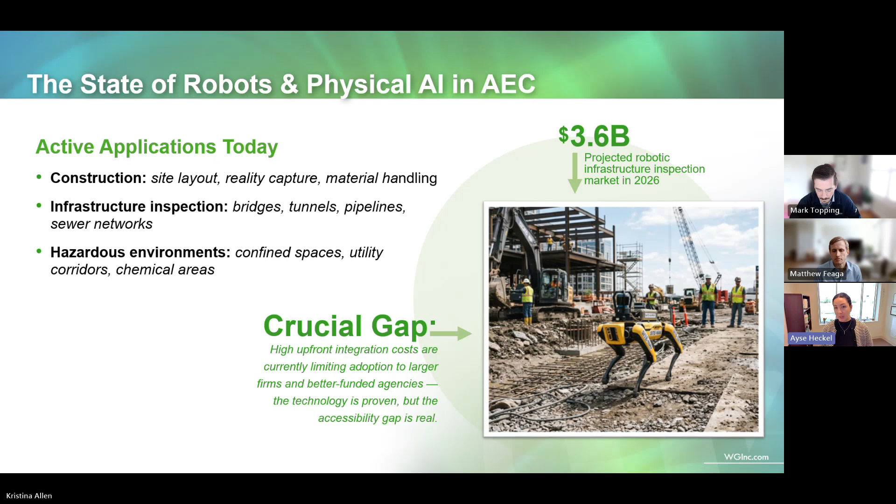That data doesn't disappear when the robot leaves the site. It feeds directly into digital twins, asset management platforms, and that is where the compounding value lives. So every future decision about that asset becomes better informed. The robot is building that evidence base.

The future model here is humans plus machine collaboration. So it's augmentation, not replacement. The people in this field aren't going away—they're being freed up from dangerous, repetitive, or time-intensive work to focus on judgment, interpretation, and action.

One crucial gap to flag is data interoperability between platforms from different vendors. This is a large hurdle—outputs from systems made by different manufacturers often don't integrate cleanly into existing project workflows without significant customization.

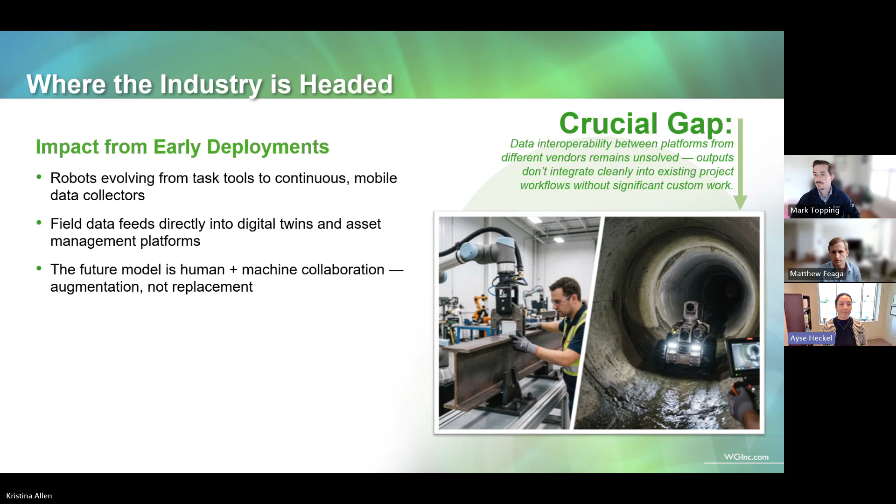Now, the challenges the industry is working through. High upfront integration costs are limiting broader adoption. While we see that decreasing, it's not fully accessible to everyone in the industry.

Plug and play deployment at scale is not here yet—every site still requires meaningful customization work. Data interoperability gaps between vendor platforms slow down workflows, and change management adds real friction to adoption decisions.

Regulatory frameworks for semi-autonomous systems operating in public infrastructure environments are still developing, which creates uncertainty that some clients and agencies are navigating very carefully.

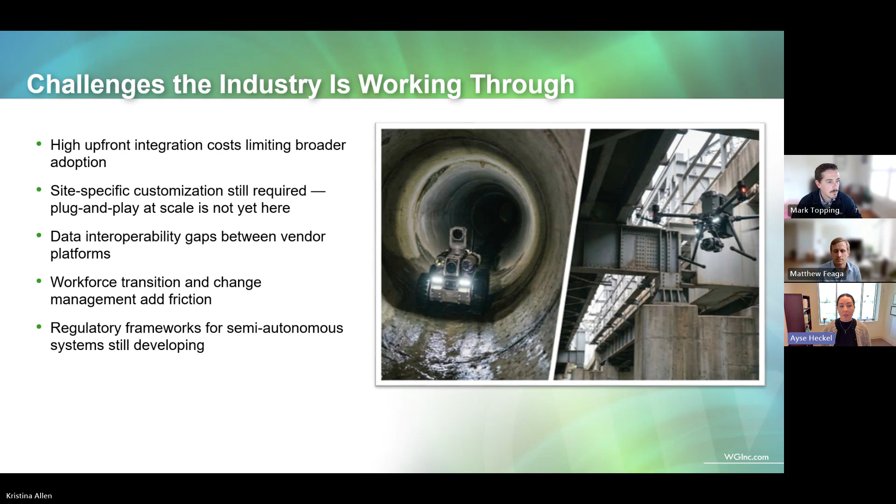So to frame all of these challenges: these are barriers, not deal breakers. They're shaping the pace and pattern of adoption, not stopping it. The question for any agency or firm evaluating this technology today is not whether to engage, but how to engage thoughtfully, with the right strategy and the right partners.

So how is WGI positioned? How does WGI interact with this new technology? Let me be very direct about where we fit and where we don't. As of right now, WGI is not building robots and we're not operating them. Our value is in the intelligence and data layer that makes robotic systems useful over time.

Our digital service and innovation engineering practice tracks where physical AI intersects with infrastructure delivery. Our geospatial data collection capabilities, digital twin development work, and modeling capabilities are directly applicable to the integration challenge that physical AI creates.

So the way I'd frame it is that WGI provides the digital infrastructure layer that turns robotic data collection into long-term asset intelligence. Whether a client is evaluating robotic inspection for their bridge portfolio, thinking through site automation on a project, or working through a data integration strategy, WGI bridges the gap between what the technology can do and what the outcome really needs to be, for any project of any size and scope.

And with that, I'll hand it over to Matt, who's going to walk us through what's happening on the 3D printing side.

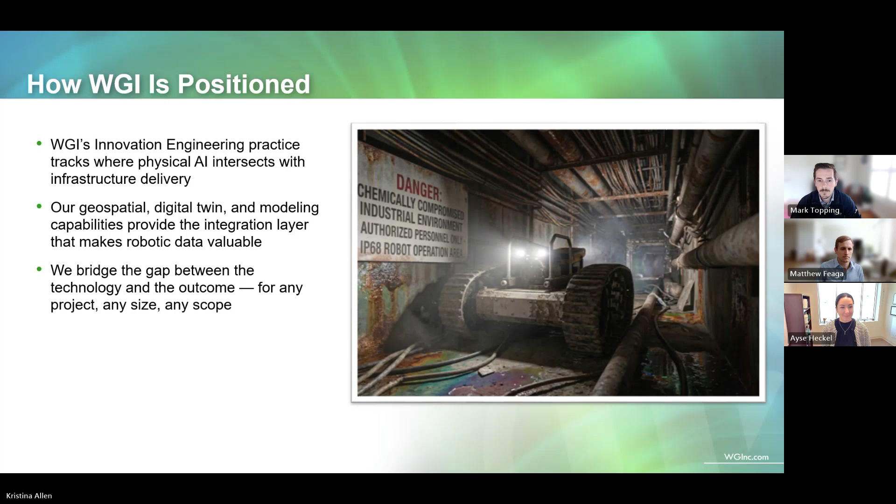Hi everyone, I'm going to talk about some exciting new developments in 3D printed building technology. 3D printed buildings are not really new news anymore—the technology's been around for many years, and many of us here today have probably either seen or been inside an actual 3D printed building at some point.

It's been around long enough that WGI has provided MEP and architectural services to Icon on multiple projects of varying scale over the last several years. If you aren't familiar, Icon is probably the best known 3D printing company out there, and we've worked on projects ranging from prototype to residential development and even larger scale standalone buildings.

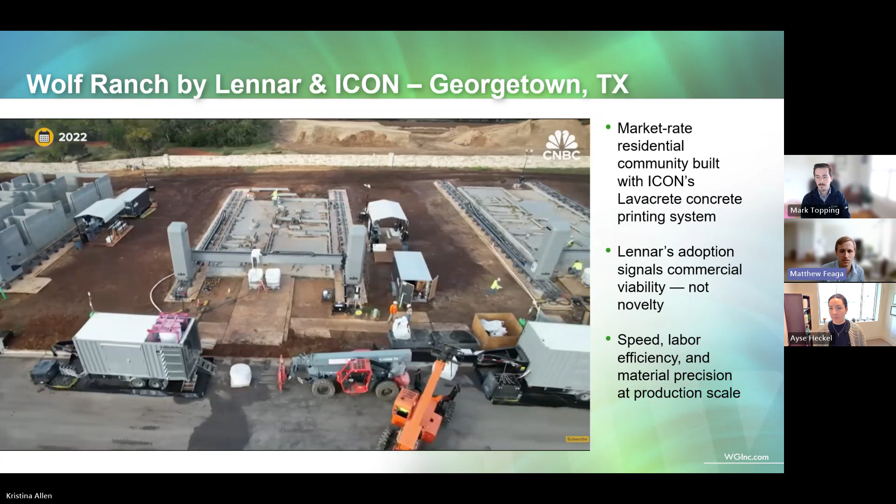To get a feel for what 3D printing has been able to achieve in recent years, we'll start by showing part of a 2022 CNBC segment on Wolf Ranch, a residential development by Lennar and Icon in Georgetown, Texas, north of Austin.

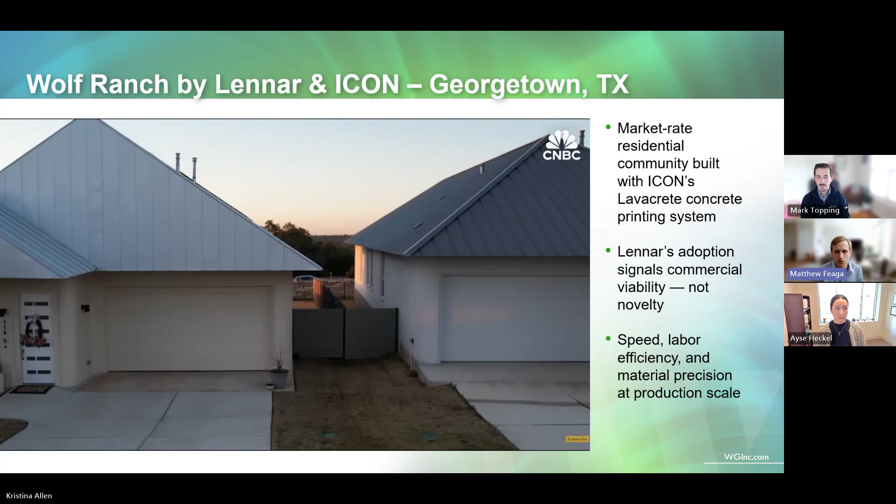You can see that gantry style printers have been the main technology so far. This style of printer is basically a print head on rails that puts down layers of concrete material that build up forms like wall systems and columns. In concept, these printers work the same way as the small 3D printers you can buy online for your home or office.

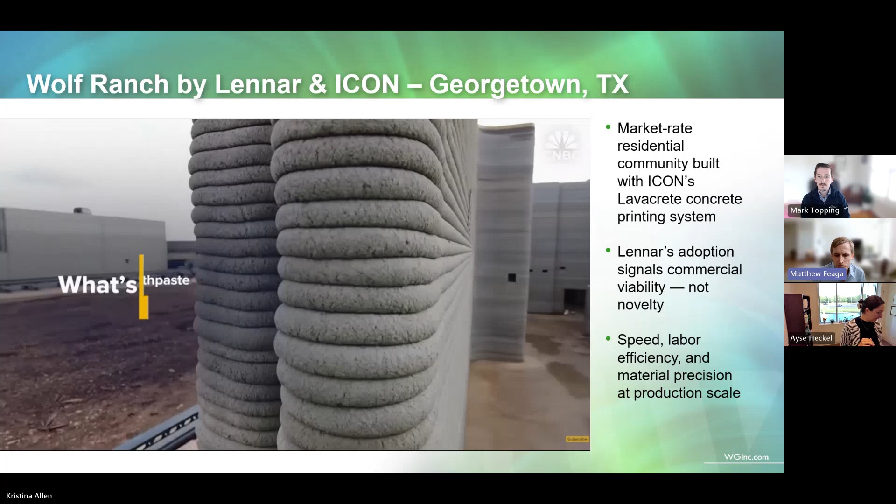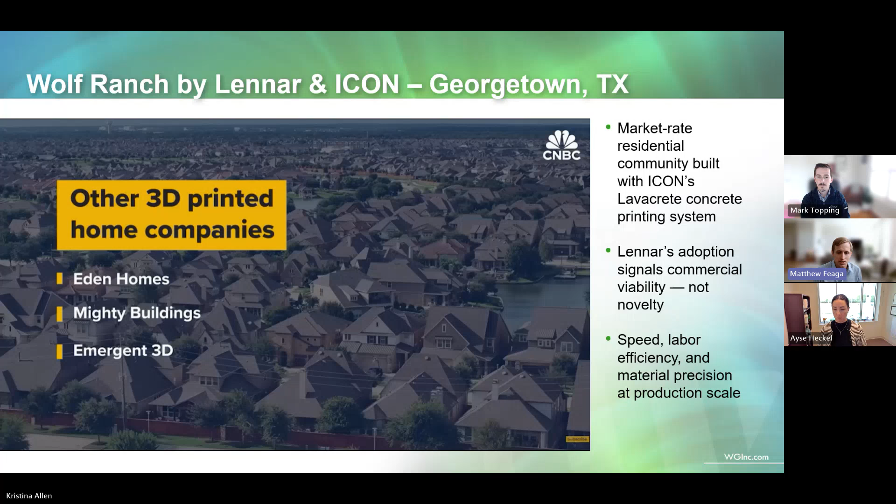The idea behind 3D printed buildings has always been to make construction more efficient, affordable, resilient, and customizable by feeding your design into a machine that does most of the hard work for you. So while the idea has a lot of potential and has had success, as you can see from this development, scaling it to truly world-changing levels has so far been challenging.

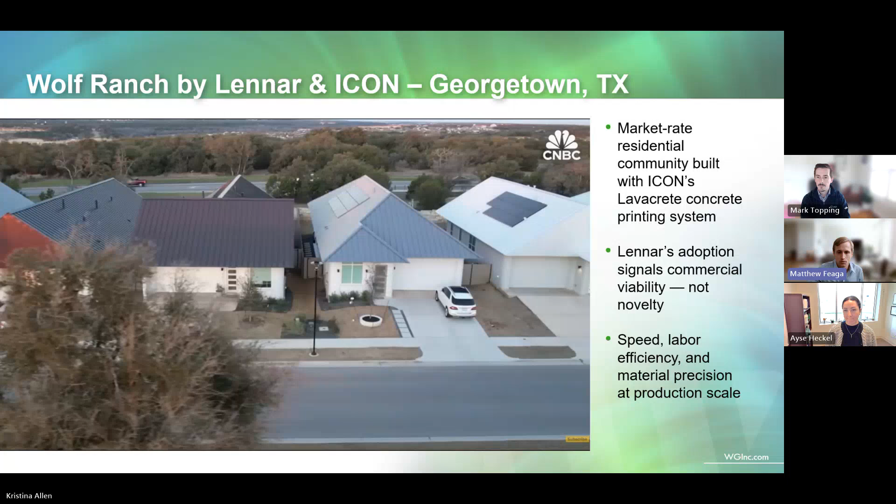Let's talk a little bit about the limitations of these gantry-style printers. Perhaps the biggest issue is that print volume is constrained by the height and horizontal extents of the printer's rails, which typically limits us to printing one story, and only wall systems instead of the entire building, like roofs or second stories.

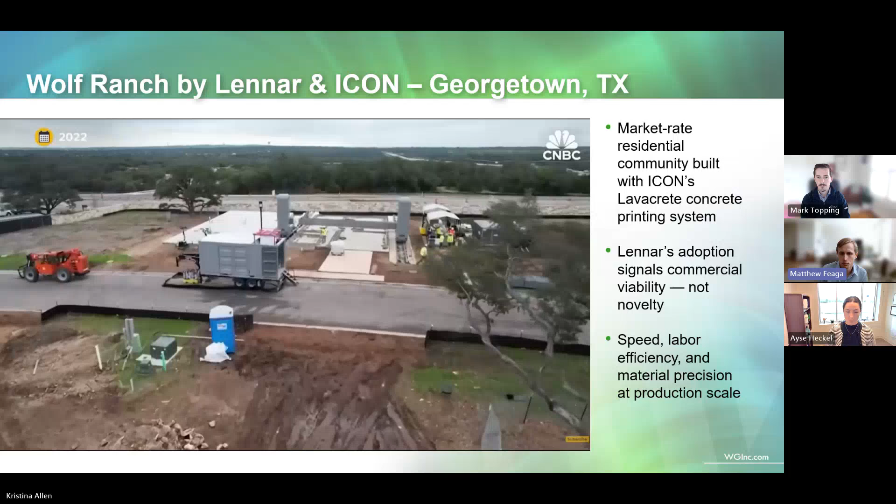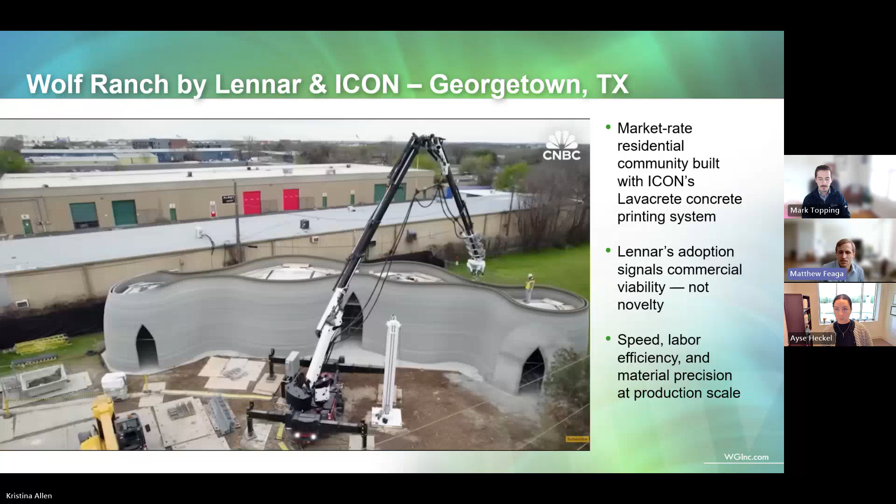Moving and setting up the printers from site to site is time consuming, and print speed is not particularly fast. In addition, a print must be monitored by three operators, meaning skilled labor must be on site at all times while a machine is running. Design and construction coordination to integrate printed versus non-printed systems takes time, though that wasn't necessarily an issue for this Wolf Ranch site.

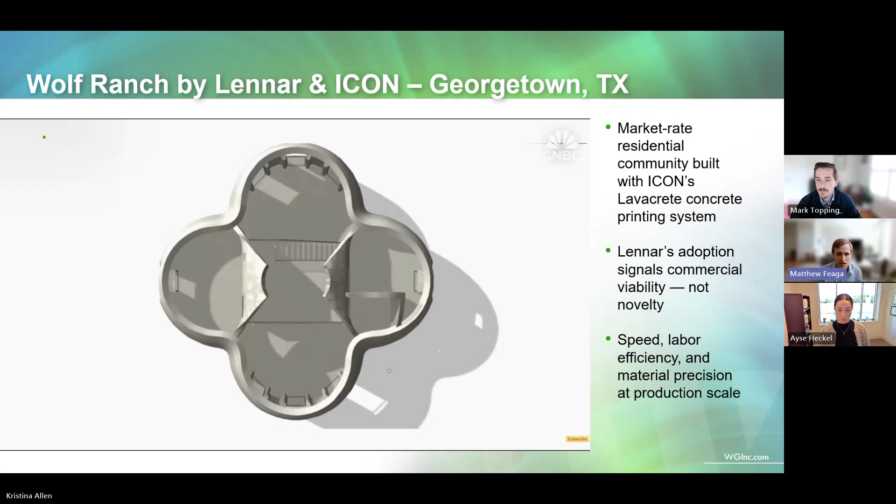It is difficult to maneuver the equipment on tight urban sites, which is why development has so far mostly been done on sites with lots of space, as you can see here. In this video, the leaders of both companies are extremely candid about what they experienced on this project.

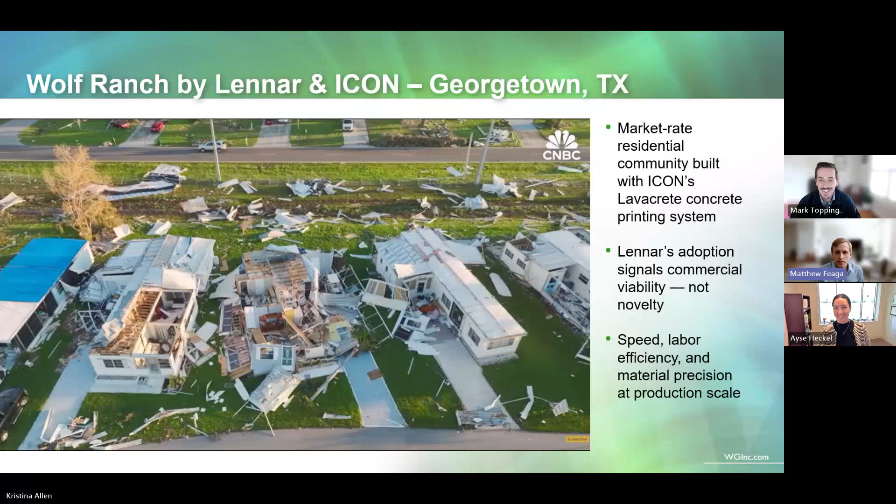This development was a bit of a trial. This lady loves her house, by the way. She's great, you should go watch this video later. They're very open about how this development was a bit of a trial in innovation, and some of the lessons they learned along the way informed how they went about executing the project as it continued on.

This actually led to the houses being marginally less profitable than Lennar typically sees on its standard project. But the fact remains, this is a real market rate residential development. When a home builder at Lennar's scale adopts a technology, it sends a signal to the rest of the industry that this technology and its potential economic benefits should be taken seriously. And in this case, those benefits are not just production automation, but I would argue that the unique building designs add value as well. As you can see, many of these homes have unique features like curves and other interesting elements that drive value.

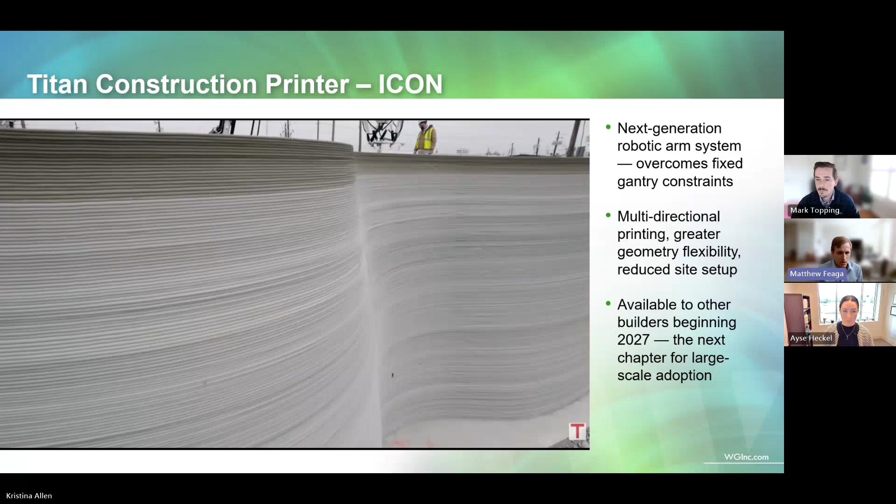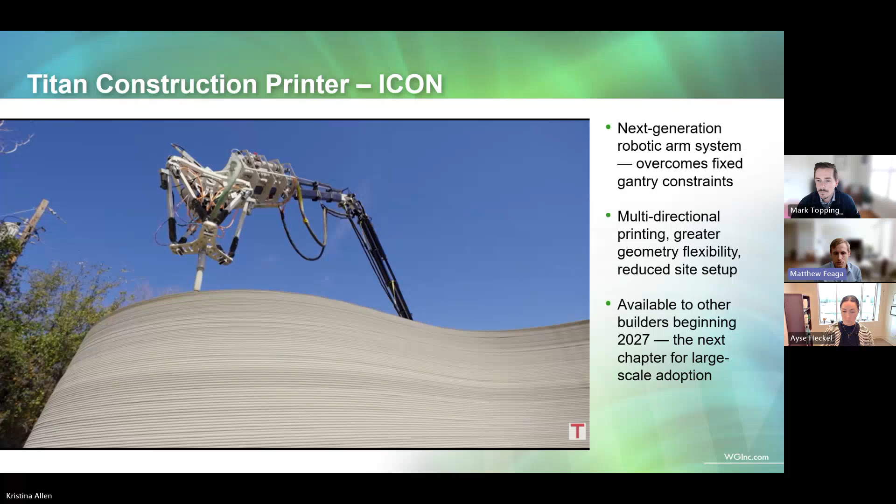So here's another video from Adam Savage's Tested. All the challenges that I've discussed previously have led to the need for a next generation of printer. And this printer needs to be easier to use, print taller, and print a more flexible footprint. And as you saw at the beginning of the video, that is Icon's new Titan printer, which is a huge change to an ARM style design.

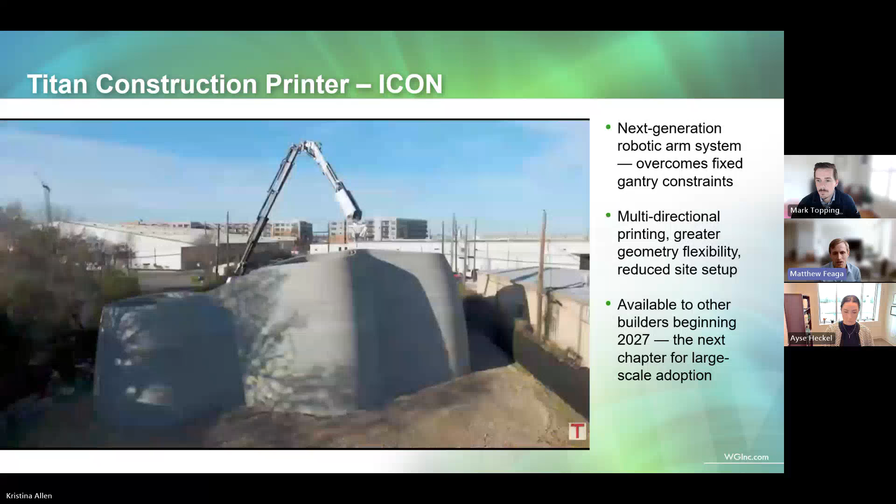Besides printing bigger and taller, this printer also allows for 2 prints for each mobilization, which basically means you set it up between 2 sites and it can spin around to cover more area without having to move it.

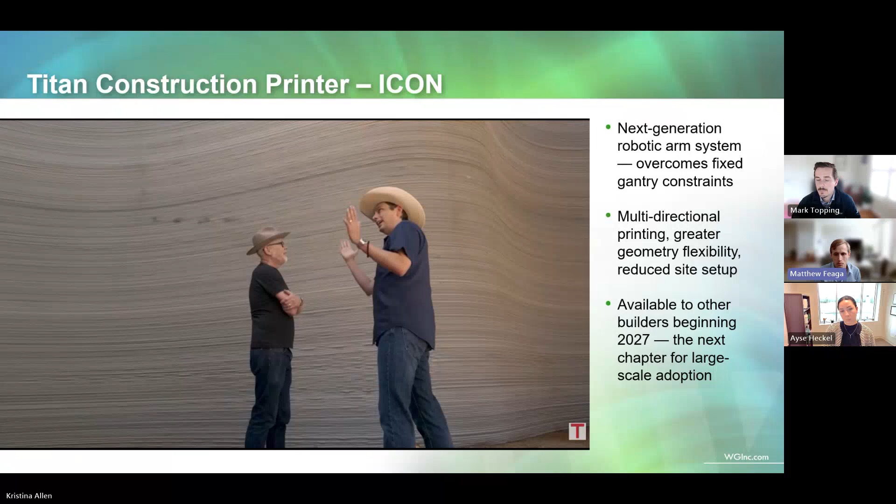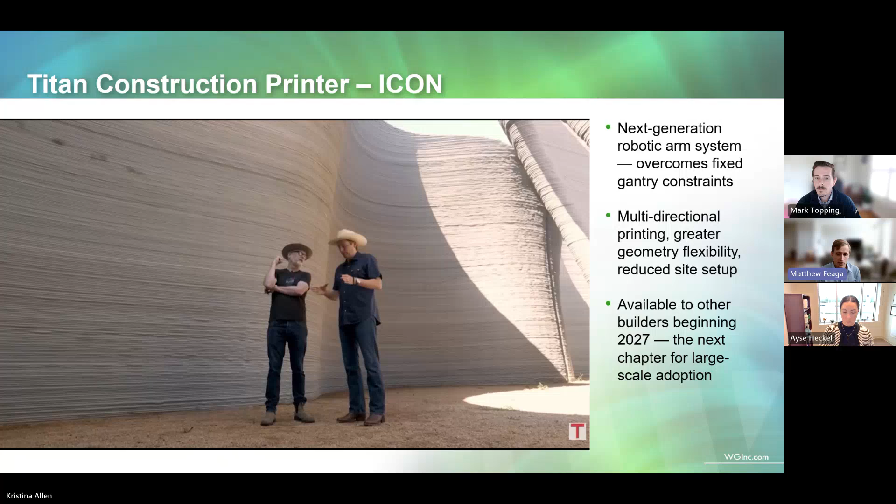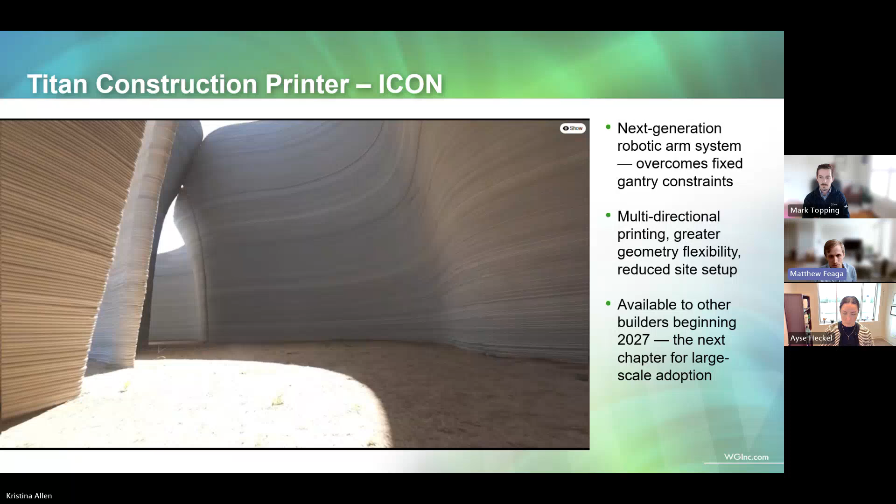According to Icon, this printer is also capable of operating with only two operators instead of three, and it uses newer technology to reduce setup time. All of these improvements serve to reduce the overhead that causes costs to be higher than we would like. And it also, perhaps the biggest impact is that the improved ease of operation allows 3D printing companies to sell these machines to other contractors instead of just producing the buildings themselves.

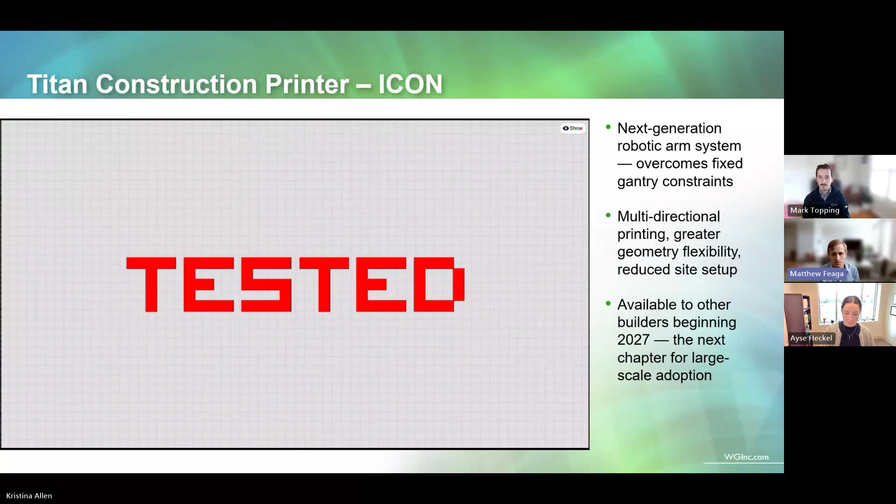This item has the potential to really quickly increase the adoption of 3D printing throughout the industry and change the economics behind it. This FYI, Icon is currently taking reservations for the Titan with planned delivery in 2027, which is really not that far away. So I look forward to seeing how that goes.

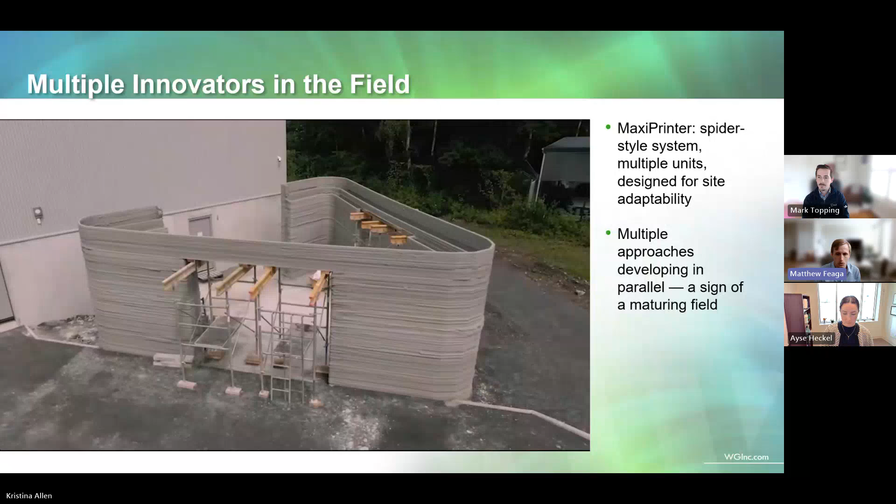So on the next slide, so it's not just Icon doing this around the world. There are several other companies out there producing 3D printers for buildings. And here you see the MaxiPrinter by a company called Constructions 3D based in France.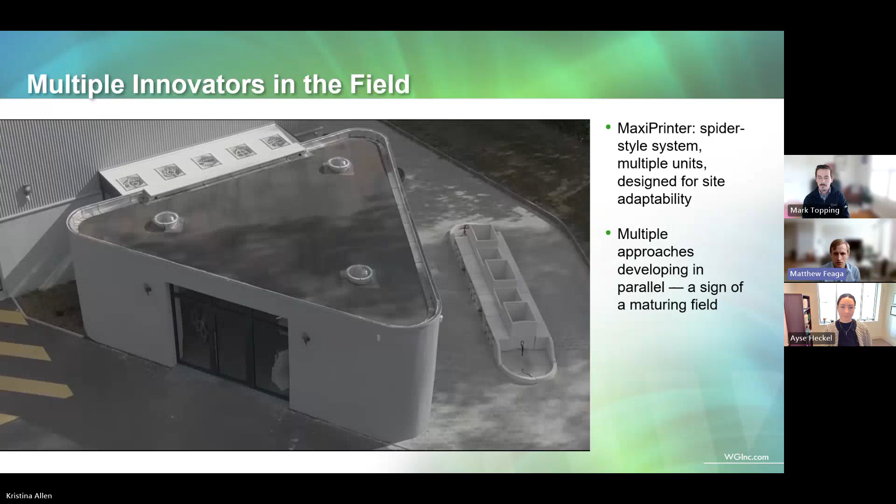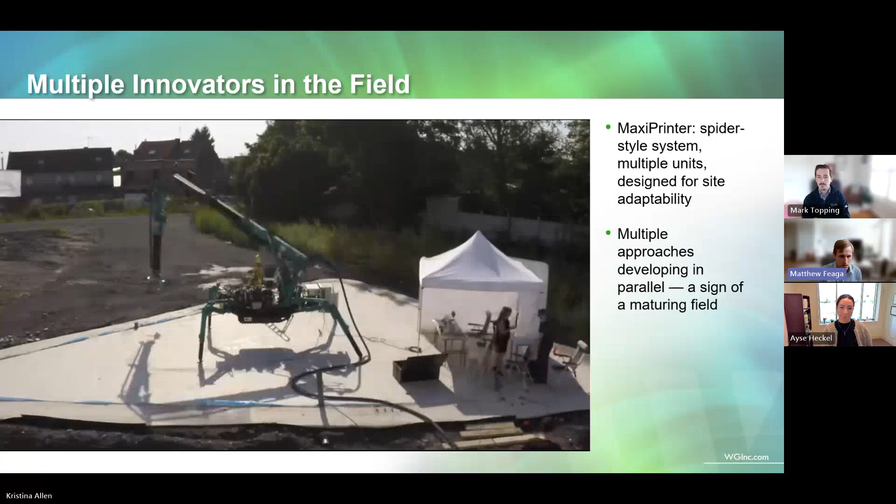So you can see that the arm-based design is emerging as the go-to form factor, though specifics may vary slightly from printer to printer. This printer, for example, has a more spider leg base than the Titan and is geared toward portability. You can see it getting set up and going to work here. There it goes. All right, you can go to the next slide.

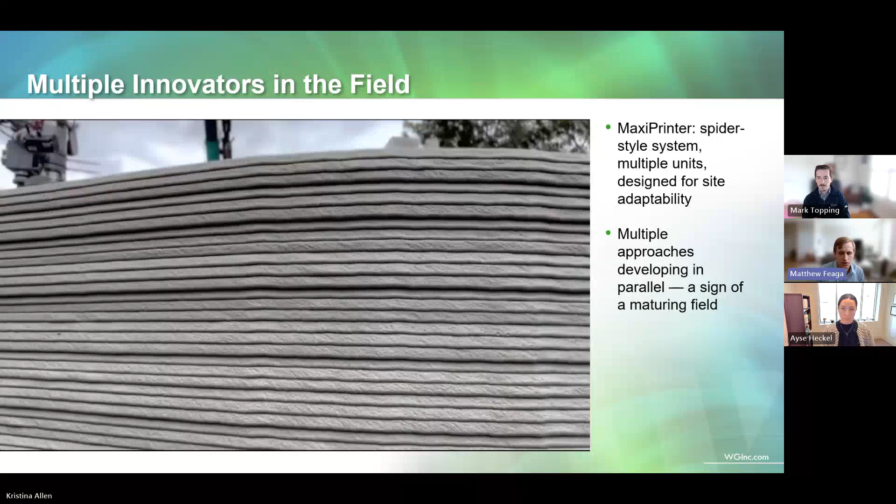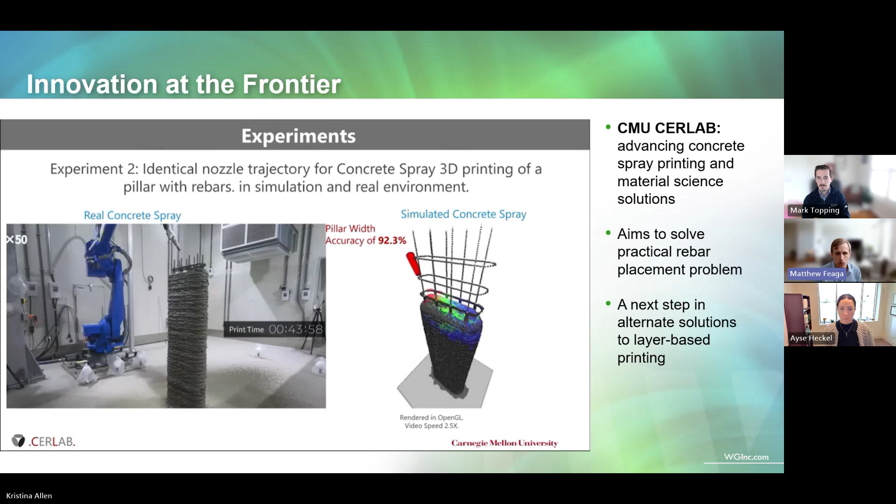And it's not just machinery that's advancing either. Materials research is ongoing as well. One big challenge has always been inserting rebar reinforcement into layer-based prints. And Carnegie Mellon's Computational Engineering and Robotics Lab has been experimenting with spray-based applications that would apply material directly onto formed rebar. If this research pans out, it could unlock a huge number of new architectural and structural use cases where 3D printing is currently not possible.

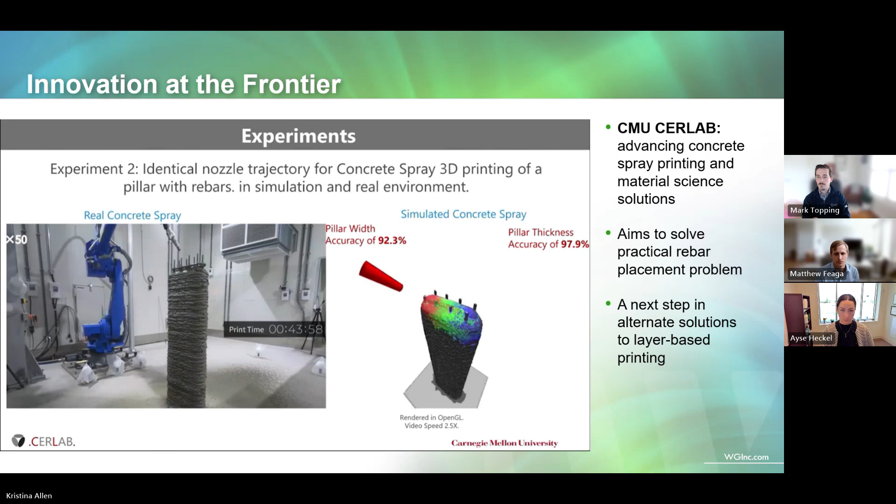So let's tie it all back to how this impacts WGI as a professional services firm. As I mentioned at the beginning, the team at WGI has worked with ICON on several projects. And what we've seen is that there needs to be an extra level of consideration for data in order to maximize the impact of automated construction. These machines are only as good as the data that gets fed into them. So the big question becomes, how quickly and efficiently can we get from a design model to machine input?

Our team produces high-fidelity BIM models that feed into ICON systems, and while model geometry and standard takeoffs remain important because we still have to create 2D drawings for permanent construction, the data representing that geometry is even more important. Our VDC and innovation teams have created automation tools and data extraction strategies alongside our models that go 1 or 2 layers deeper than we would on a traditional project. And this helps the design team and our client tighten design-to-print workflows that better harness the technology's potential.

So my experience working on 3D printed projects, it has honestly been awesome to see how we've been able to leverage technology to help eliminate the gaps between what we put on paper and what these printers create in real life. And I know that we're all excited by where this next generation of printing technology is poised to take us.

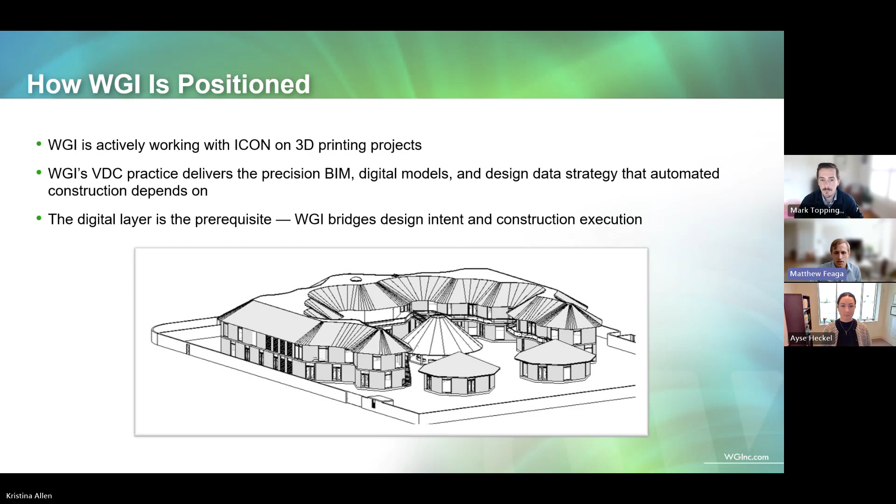And with that, that's all I know about 3D printing. I'll kick it over to Mark, who's going to talk about autonomous vehicles.

Thank you, Matt. Very interesting. My name is Mark Topping, a client solutions manager with WGI's geospatial division. We specialize in using multiple data sources, remote sensing, surveying, and subsurface utility engineering to support data to design off of, and to produce as-built models off of, for a wide range of applications, from transportation to utility infrastructure and beyond, in a wide range of environments. That's what we kind of specialize in.

Ayse highlighted earlier in the robotics section that we are not yet collecting geospatial data directly with robotics, but we are headed that direction and directly engaged with producing and surveying geospatial information that supports infrastructure in the advent of autonomous vehicles. So let's jump into it.

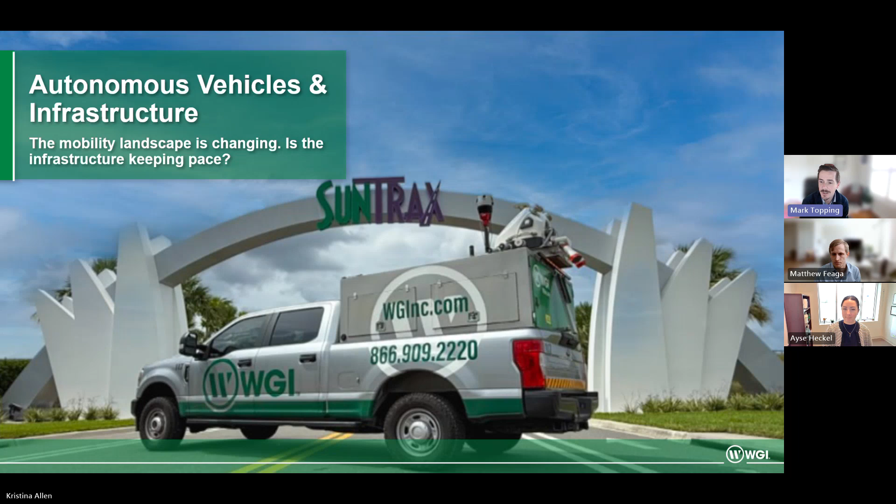We'll talk about the AV ecosystem. Of course, everyone's mind would likely jump to self-driving cars when they think of the term autonomous vehicles. That is certainly a large factor in designing infrastructure around self-driving cars. Keep in mind, there's a lot of similar technologies that self-driving cars use themselves, because they need awareness of their environment to safely operate.

Self-driving cars often utilize multiple LiDAR scanners. LiDAR is a technology that collects 3D spatial information around a sensor based on the reflection of light and the timing to very precisely measure objects around a LiDAR scanner.

Photogrammetry methods are also used in self-driving cars. Mr. Elon Musk and Tesla have sort of adopted the photogrammetry model for Tesla vehicles.

But autonomous vehicles goes well beyond self-driving cars. WGI is a supporting engineering firm and a geospatial service specialist with a highlight in diversity of data and information, and we are starting to see the advent of other automation.

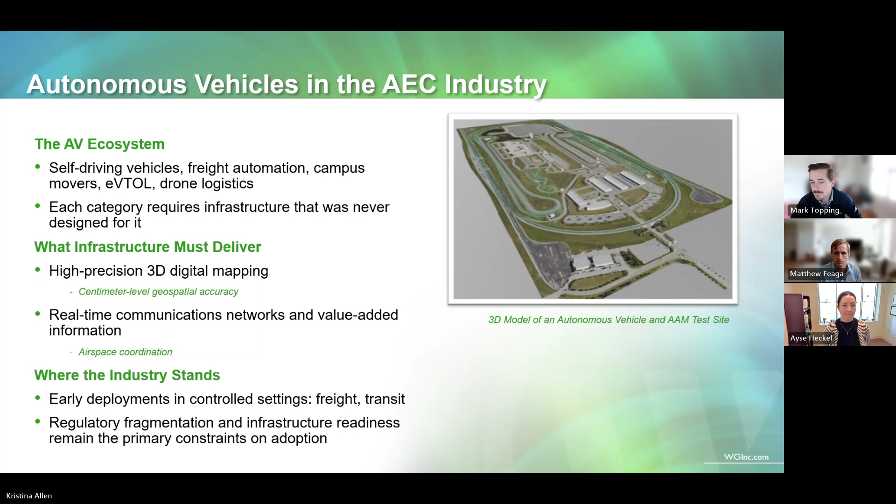Here's a good example of WGI's support role in developing infrastructure that supports research on advanced air mobility. In this case, ideally, the end goal is to reduce congestion through the I-4 corridor between Tampa and Orlando, and allow for additional benefits like safety, transportation efficiency, and congestion reduction as the Orlando area continues to grow.

It should be noted that regulatory compliance is being developed for autonomous aerial vehicles. The FAA has their Part 108, which covers heavy lift drone operations for carrying heavy cargo and potentially humans. So that is an ongoing consideration—the regulatory environment for Part 108 and the FAA.

I'll jump quickly into WGI's role in this project at SunTrax. We used multiple data sources from aerial remote sensing to terrestrial mobile scanning, all tied into a uniform control network where we collected a very diverse and high quality range of geospatial data to map and model every inch of the facility, perform a high fidelity design survey, and produce a 3D building information model of the facility for future development, airspace considerations, and environmental considerations as infrastructure is built to support advanced air mobility.

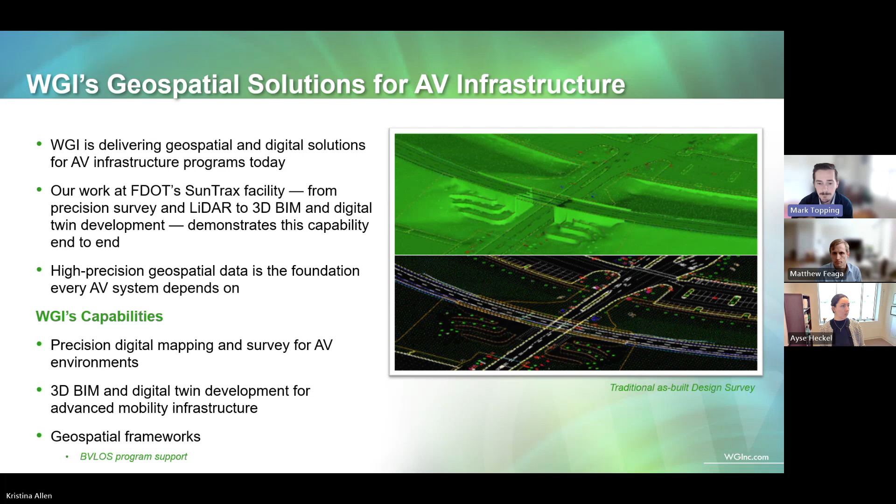So as we wrap up this presentation, I'd like to look at the future of infrastructure technology, tying all three of these threads together. The common denominator across robotics, 3D printing, and autonomous vehicles is digital maturity, digital delivery, and standardization of those digital products. That's really the foundational layer of developing all three of these emerging trends.

Integration of systems, expedition of near real-time data, so that we can support a more rapid deployment of these technologies. They're not necessarily parallel tracks, but they're converging. Robots generate data that feed digital twins. Digital twins inform AV-ready infrastructure planning, and 3D printing requires the same precision in digital layers for its design and printing of 3D infrastructure.

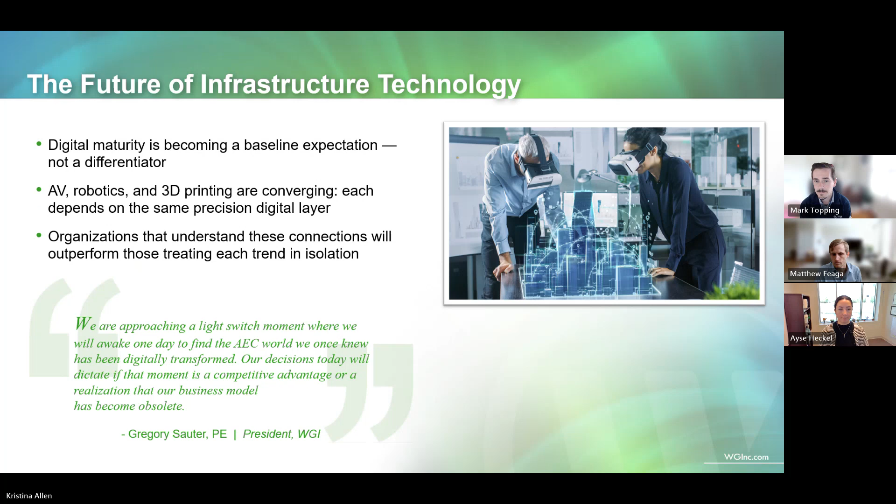Key takeaways regarding robotics: I'd like to highlight augmenting capacity, supporting efficiency, moving personnel to a quality and management role, as well as generating critical data, which is foundational to long-term asset management using robot collected data.

3D printing: commercial deployment is here for the right applications, as Matt demonstrated. And the digital prerequisites are as important as the printers themselves. These two technologies and the regulatory requirements and organization go hand in hand.

Lastly, on autonomous vehicles, this is an infrastructure systems challenge as much as a vehicle technology challenge. What we're seeing is the data is there. We have data. It's the organization and the use of the data that's critical.